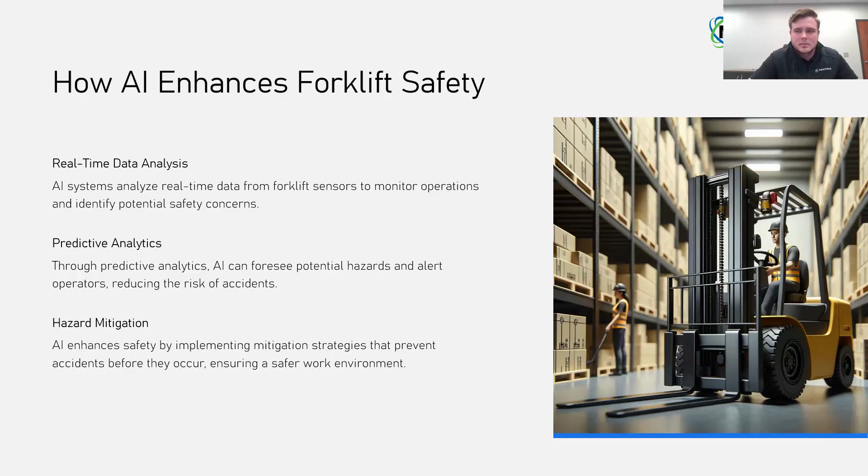So, some of the ever-evolving features that exist within the technology included on the market today: you're going to get direction of travel alerting. This is one of the first steps taken by the creators of many of these technologies to drive down what we consider nuisance alerts. You're only going to want to be alerting on what's in front of you when you're traveling forward, and then vice versa.

This also ties into the motion factor as well. If the parking brake is on and no one's in the seat of that PIT, there's no actual benefit to those alerts. Two, throttle integration allows the system to take action on real-time detection and disrupt the throttle signal to the machine, allowing the operator more time to make a decision. And then lastly, using key switch power means the system cannot be turned off and will always be operable when that forklift is running. Using a password-protected dashboard and allowing the manager to monitor who has access to the forklift system negates the possibility of the operator turning the system off or adjusting its alerting features. That's just a step in making sure we're ensuring full functionality of the system.

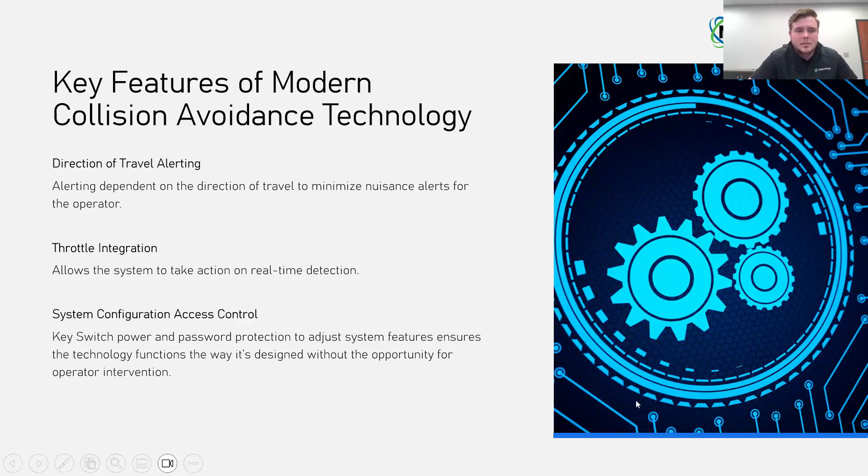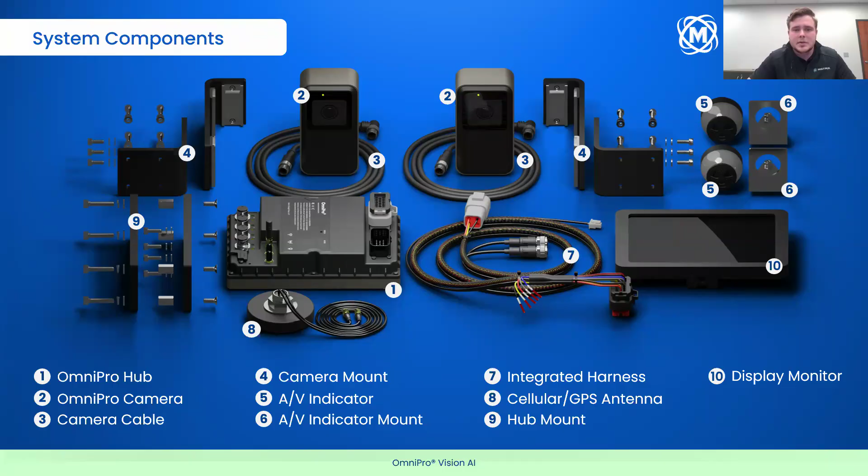Transitioning to our theory of operation, this isn't a perfect illustration of what our system captures from an actual zone standpoint, but it highlights that our typical configuration comprises a yellow warning zone and a red alert zone. Alerting in each zone depends on customer wants and needs, but standard alerting has a yellow zone breach trigger the visual indicator light to turn yellow, while a red zone breach turns the light red, triggers the audible alarm, and interacts with the throttle. You'll also get a good idea of where all the components are mounted on the lift.

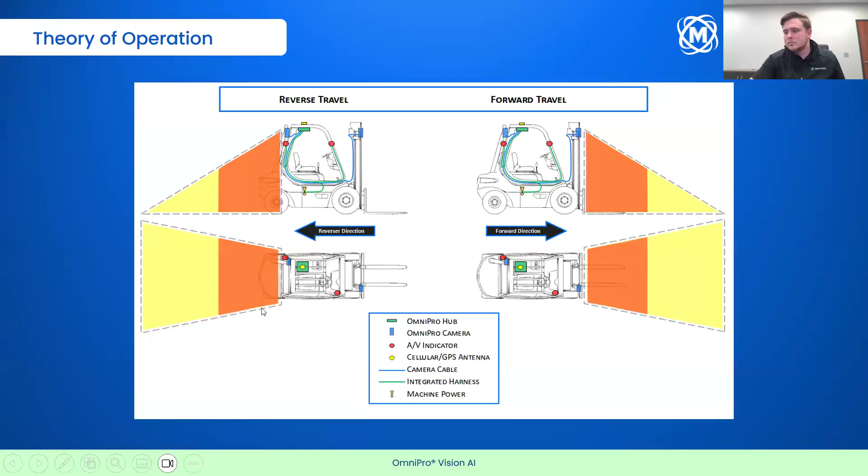Looking at a true example of a warning zone breach on this slide, you'll notice that we're ignoring the obstacles off to the right, a couple of carts and a pallet jack, and letting the operator know with the indicator light in the cab that there's a person inside their warning zone. You'll see that person is scored with a 71% confidence. The best way to explain that confidence score is that we don't want to alert on anything the camera is under 60% confident is an obstacle.

The reason for that is, inside a facility, if a pedestrian hangs up their PPE gear on a hook on the wall before leaving, like a hard hat and a reflective suit, at first glance out of my peripheral vision I might only be 30% confident that that's a person until I get a better look. The camera works the same way. We don't want to alert on those kinds of things. That's one of the steps taken in driving down nuisance alerts, so we're capturing true obstacles.

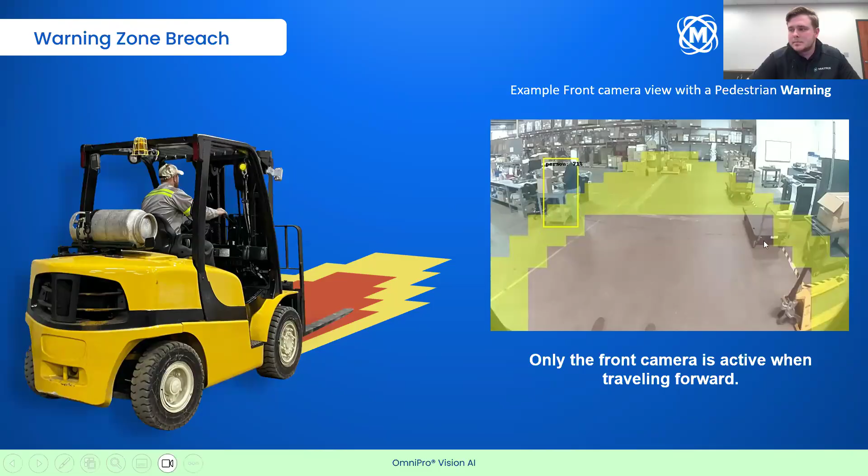Here we see an example of an alert zone breach during reverse travel, with alerting as follows: one, you get the red indicator light; two, you get the 95 decibel audible alarm; and three, you get the throttle integration disruption.

This is also an opportunity to understand that, unlike the slide before where we saw a forklift traveling in its respective area with people standing where they were probably allowed to be, this capture could be characterized as unsafe behavior inside the facility. The image data available would allow for intervention under management discretion, to be displayed as a learning opportunity. Also note that we're alerting on him even though the camera is only 46% confident—this is just an old image capture from before the firmware was advanced.

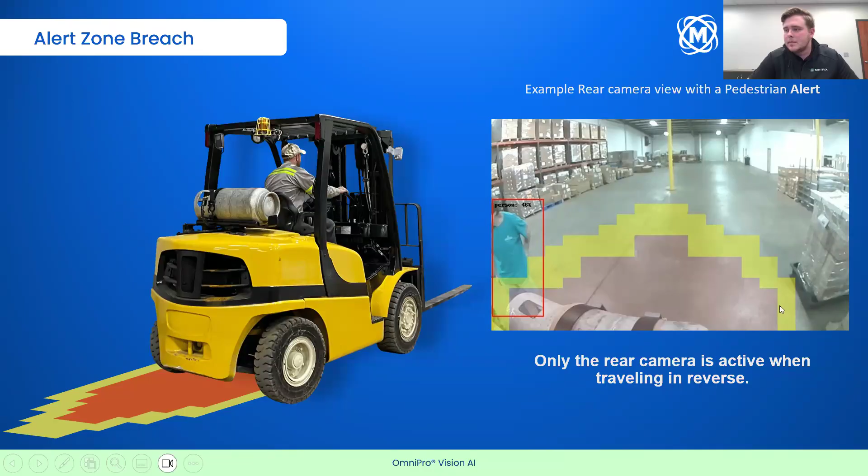Since we're capturing images rather than a live video feed of incidents, we want to show you what an example of those frame sequences looks like when downloaded. You'll see the camera detects the person in the work cell, even though they blend in with the environment around them with a blue shirt and blue trash bag liners. Here we're showing the zone breaches, but what you'll have access to are images that are pre-event, right before the zones are breached; event, during the breach itself; and post-event, right after the breach. That way you get an idea of what behavior took place to trigger those zones.

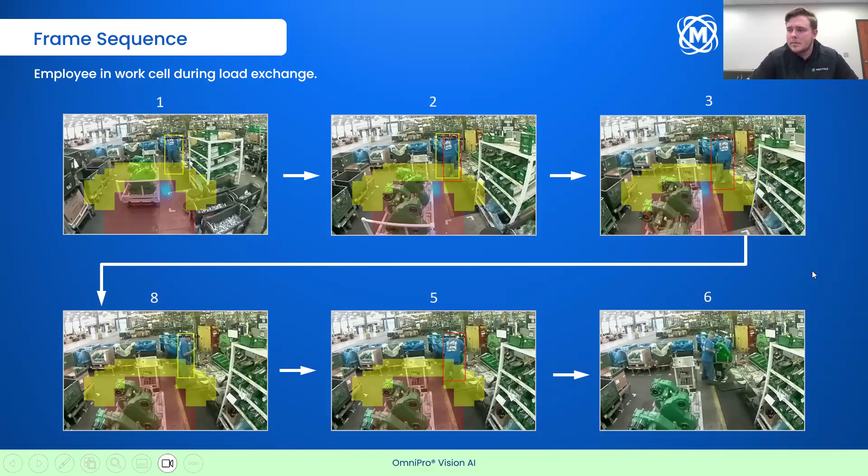So, product aside, what steps have been taken to address the struggles surrounding successful implementation into an industrial workplace? The first step is ensuring that knowledge transfer between provider and end user never stops. From the initial product demonstration to the time following completion of installation, end users have access to a 24/7 internal call line to address support needs. Firmware updates are not tied to any recurring costs, and they're shared with the customer upon release. The most key aspect to implementation is dependent on the depth of knowledge shared with key stakeholders in the facility.

Installations are requested to involve on-site mechanics or dealers who can be educated on the technician portion of the installation. Project leaders are trained on how to use the system dashboard to configure zones, update systems, and pull data from the hub. Operators are given training on how the system will react and what they should expect. Each of these items is connected to marketing and training material, including user manuals, installation guides, an operator experience video, which I'll show you on the next slide, and coming soon, an in-depth installation video.

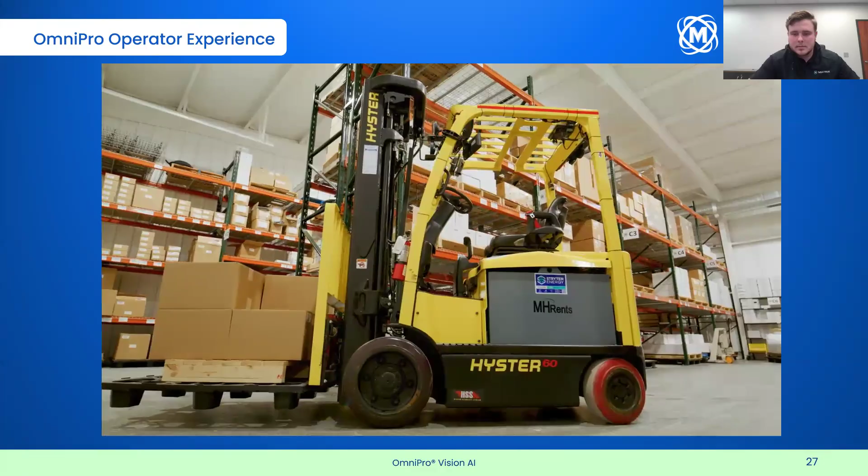OmniPro is designed to enhance safety in your facility. It visually monitors areas that may be blocked from your view by the mast or your load and alerts you to the presence of people or selected objects if they get too close. Let's take a closer look at the key components and how they interact.

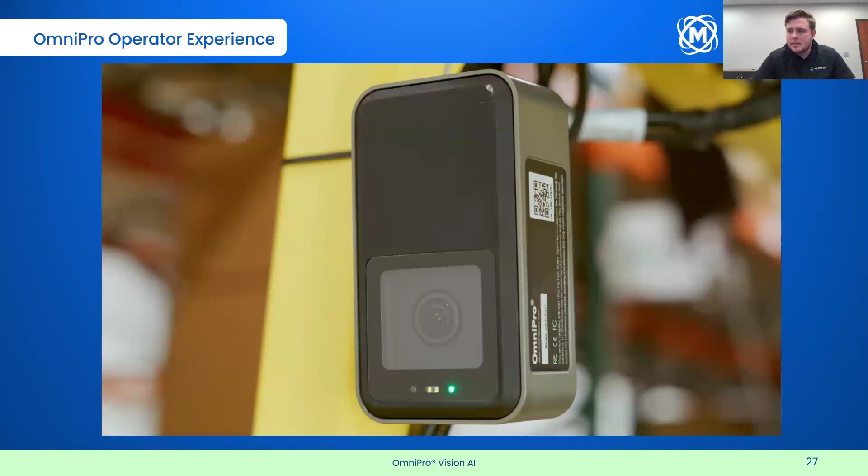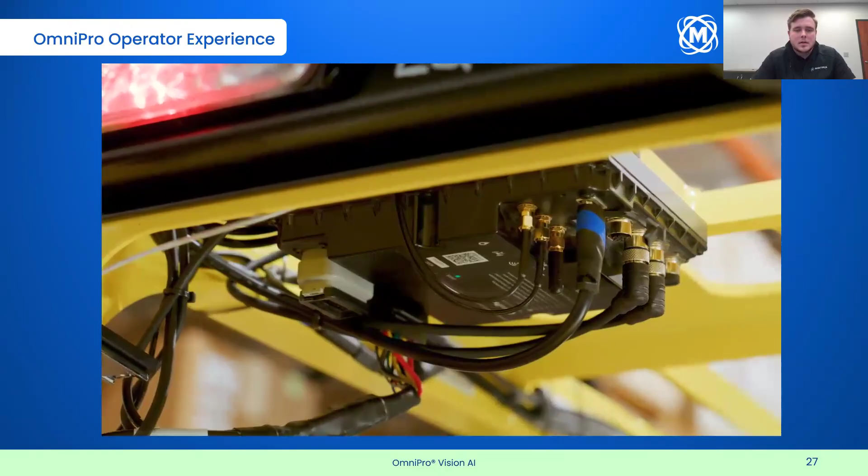The standard components of the OmniPro Vision AI system are the cameras, hub, and the audible and visual alerting devices. The hub provides power, data communication, and houses Matrix's visual artificial intelligence processing software that can provide seamless machine integration options. The camera's powerful high-speed processing takes place at the edge, on device, leveraging Matrix's award-winning technology. Its customizable zone programming helps minimize false positives and nuisance alerts. The hub also acts as a storage unit for captured, time-stamped images which can later be retrieved and analyzed for additional safety insights.

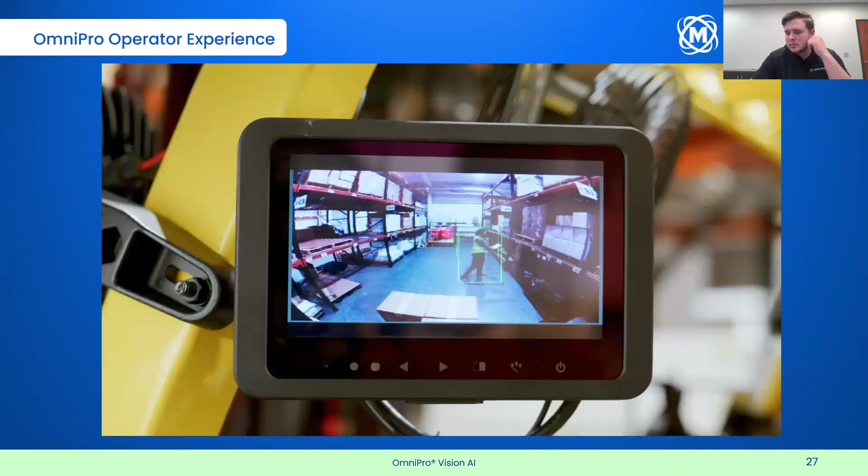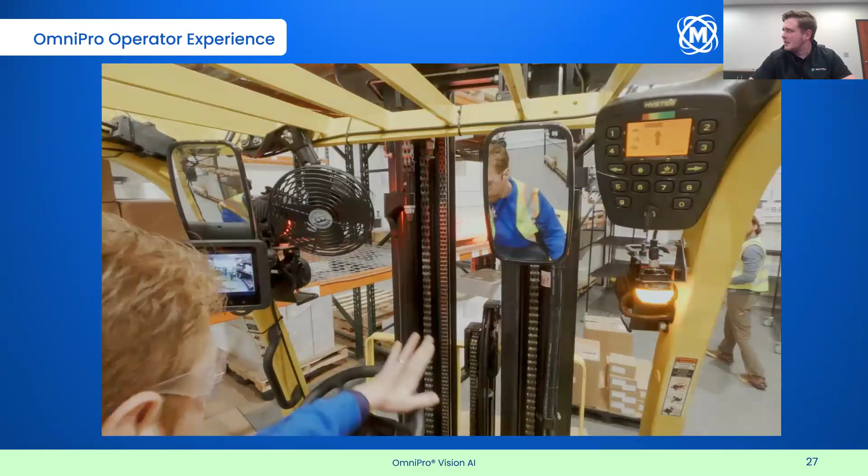OmniPro's Vision AI cameras are typically mounted facing the front and rear of the vehicle to monitor the vehicle's path of travel, automatically monitoring that path. These rugged, compact IP67 rated cameras are equipped with specialized sensors that enhance performance. The cameras gather real-time visual data and send it to the hub, where it is interpreted and, when necessary, acted upon. The audible and visual indicator devices alert the operator of a zone breach.

There is one indicator device per camera, so if you turn your head to back the vehicle, an alert device will be in your line of sight. In most installations, OmniPro creates two alert zones: a yellow caution zone and a red alert zone. The zones are customized based on your facility's requirements.

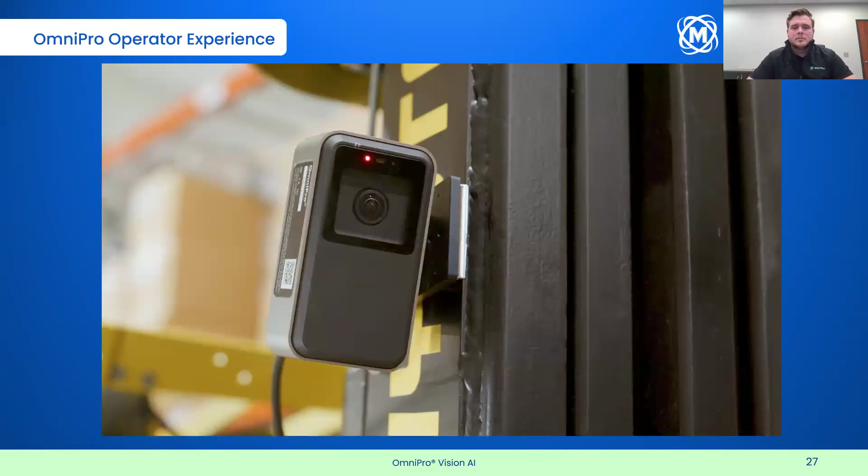After the OmniPro system powers up on your forklift, make sure the cameras are not blocked or have an obstructed view. Remove or secure anything that impairs the camera's field of view.

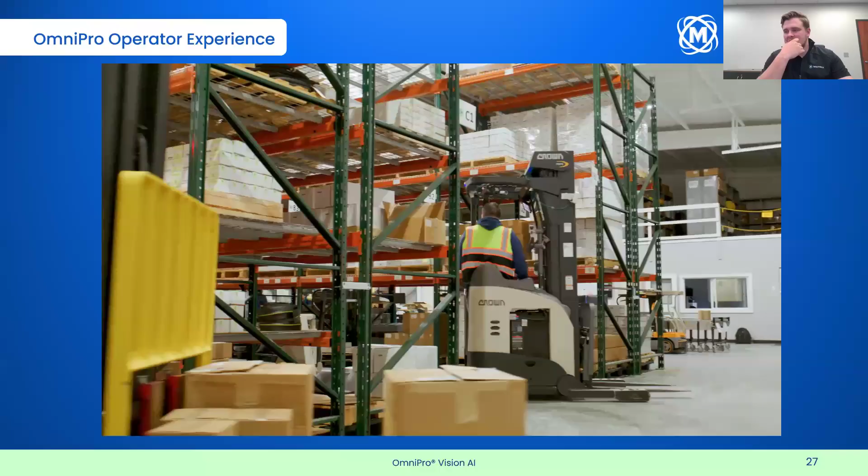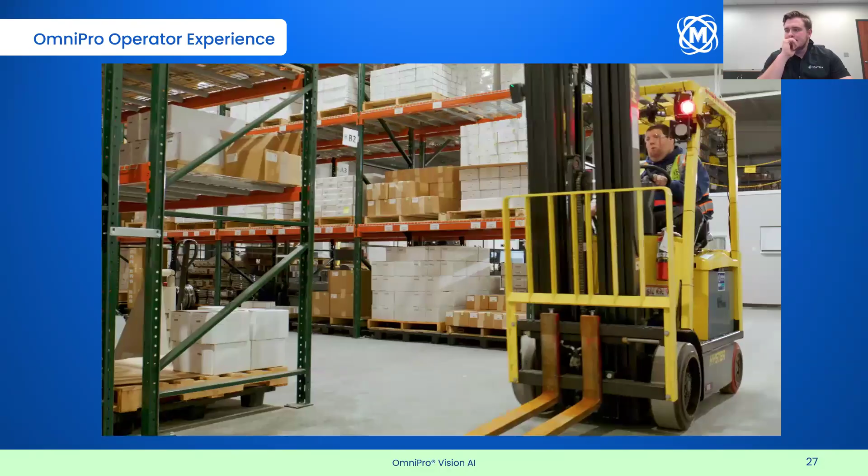Let's take a look at a situation where a pedestrian breaches a customized yellow alert zone. The OmniPro camera captures everything in its field of view and sends this information to the hub. When a person enters a yellow caution zone, they're getting dangerously close to the forklift. The hub identifies the zone breach and triggers a yellow alert light. This tells you to slow down and visually identify the location of the pedestrian, then take appropriate action.

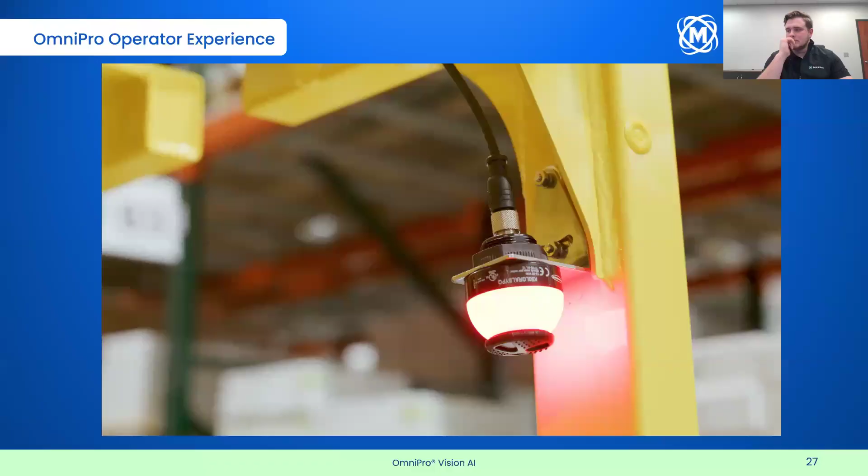Red zone alerts are the most serious because this means a person is in imminent danger of being hit by the forklift. When someone enters the red alert zone, it triggers a red light and an audible alert. This alert tells you to immediately stop until you can visually identify the location of the pedestrian. When they are clear of the red zone, the audible alert will stop.

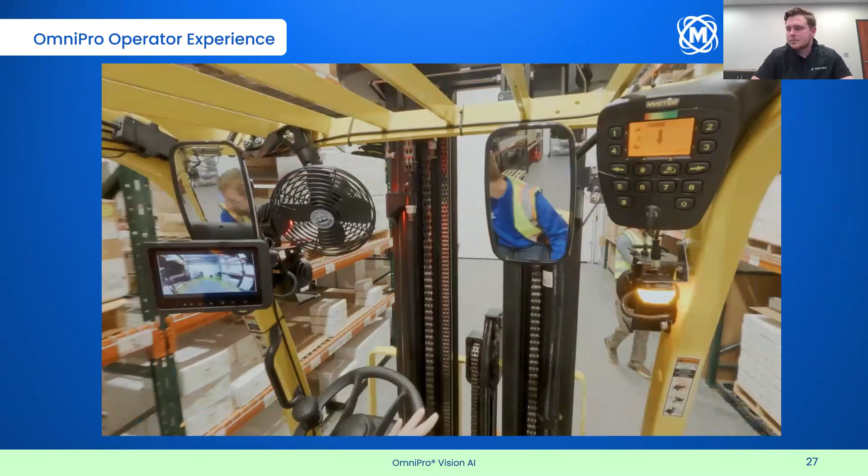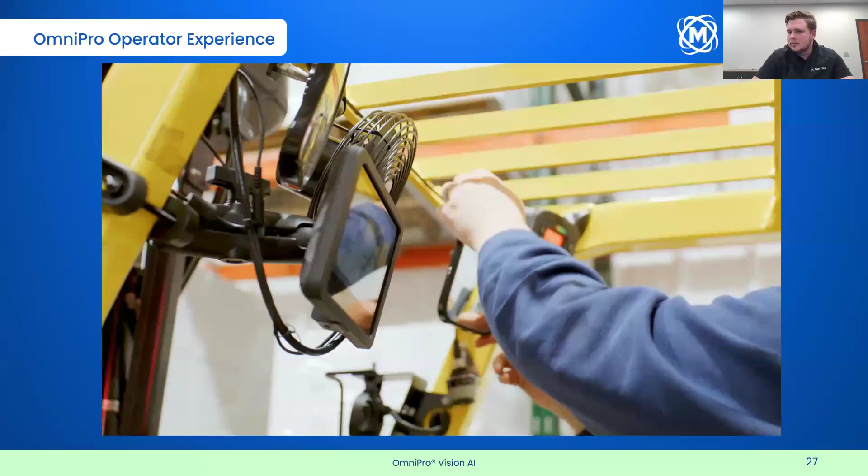As a forklift operator, your responsibilities include the proper use of the OmniPro Vision AI collision avoidance system, adhering to your facility's safety protocols, and reporting any issues or incidents. To ensure safer forklift operation, always perform regular system checks, position cameras correctly, maintain clear communication with your team, and never assume someone sees you. These practices and a properly working OmniPro system will help you avoid accidents.

1. Keep up to date on safety training. 2. Inspect your forklift before starting your shift to make sure all safety equipment is working properly, including your OmniPro system. 3. Learn how to avoid, when possible, driving in areas with a high concentration of workers. 4. Don't speed while operating a piece of mobile equipment. 5. React immediately to all OmniPro zone breach alerts. 6. Share your ideas on how to create a safer work environment. 7. If you encounter any issues with OmniPro, report it to your maintenance team immediately.

Thank you for watching the OmniPro Operator Experience video. You and OmniPro are helping create a safer and more efficient workplace.

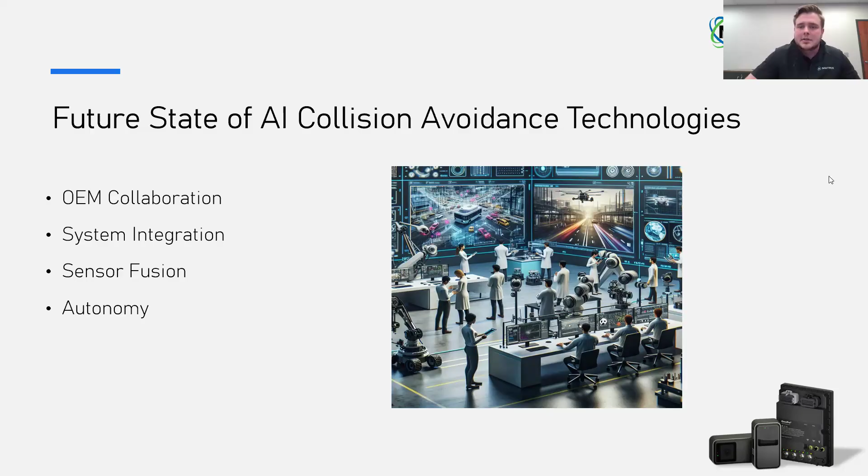To summarize, AI and collision avoidance have revolutionized the way workplace safety is perceived and achieved by putting the safety of people at the forefront of the movement without impeding on productivity capabilities. A new set of safety standards has begun to cultivate itself with AI driving the force.